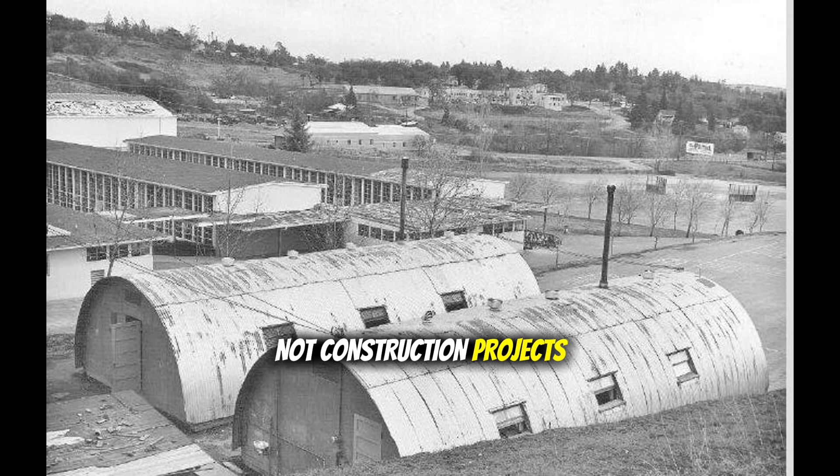The Navy consolidates this thinking at their facility in Quonset Point, Rhode Island, a freshly commissioned air station on Narragansett Bay.

The location isn't random. Rhode Island has deep manufacturing expertise in sheet metal from its jewelry and silverware industries, plus proximity to steel mills in Pennsylvania and shipyards that understand marine-grade corrosion resistance.

In March 1942, the Navy assembles an unusual team: structural engineers from the Stran-Steel Corporation who've been building prefab farm buildings, architects from George A. Fuller Construction Company who specialize in rapid assembly methods, and Navy officers who've actually served in the Pacific and know what typhoon-proof really means versus what it means on paper.

The team lead, Otto Brandenberger, brings farm building experience that turns out to be exactly right for this problem. His Stran-Steel barns use self-supporting arched panels, no internal frame needed, which means no wood for termites to eat and no complex joinery to fail during storms.

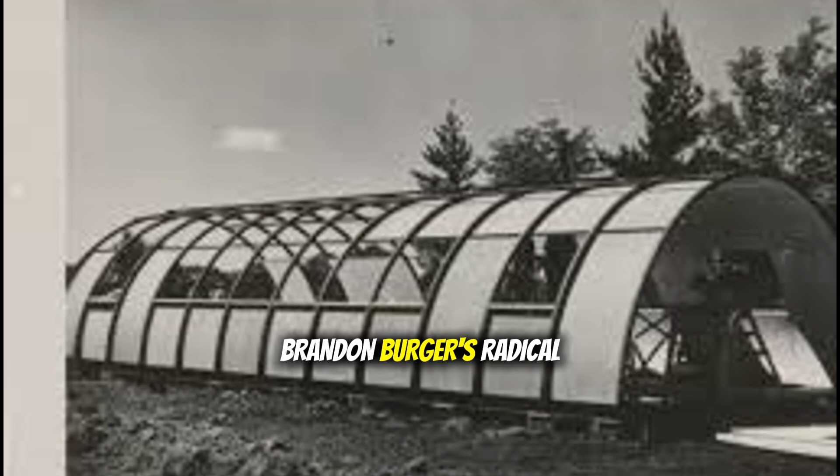Brandenberger's radical proposal: eliminate the Nissen hut's wooden skeleton entirely and make the corrugated steel skin carry all the loads. This violates conventional architectural wisdom in 1942, where steel is for bridges and skyscrapers, not self-supporting buildings. But Brandenberger knows his barns have survived Midwest tornadoes without internal framing, and he's willing to bet the same principle scales up.

The British contribute another crucial element through their painful experience. Their Nissen huts in Burma and Singapore have taught them exactly how tropical environments destroy buildings. Fungus isn't just cosmetic. It literally eats through wood preservatives and paint within months.

Humidity doesn't just make things damp. It corrodes metal fasteners until roofs collapse. Insects aren't merely annoying. Carpenter ants can reduce wooden support beams to hollow shells in one season.

The British reports read like horror stories, but they provide the Quonset team with a checklist of everything that must be engineered out of the design from day one.

No wood in contact with ground. All steel, hot dip, galvanized, not just painted. Ventilation aggressive enough to prevent condensation. Every fastener accessible for replacement without disassembling the structure.

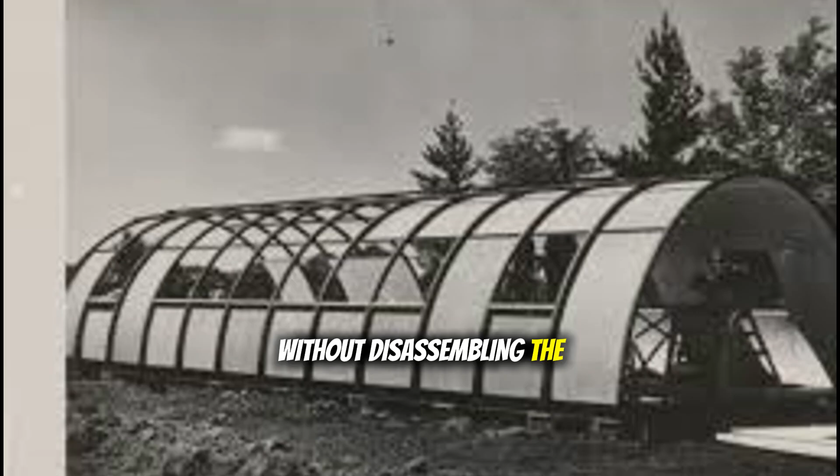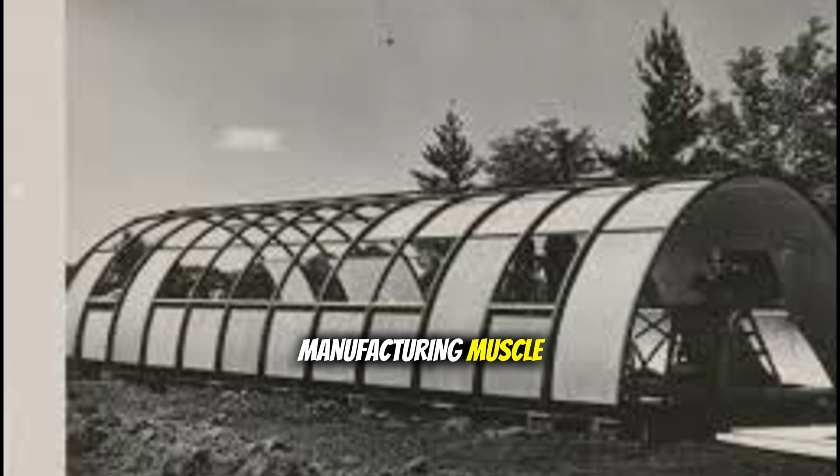By April 1942, the hybrid vision crystallizes. Take the Nissen hut's brilliant arched geometry, strip out everything that makes it heavy or vulnerable, add Fuller's mass production philosophy and American steel manufacturing muscle, then engineer every detail for the specific hell of Pacific Island warfare.

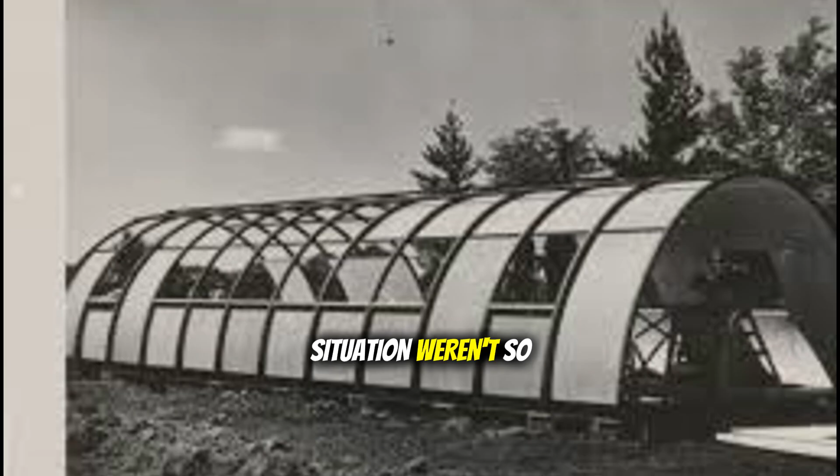April 15, 1942. Otto Brandenberger walks into a Quonset Point warehouse with 30 engineers and a deadline that would be laughable if the war situation weren't so desperate: 60 days to design, prototype, test, and approve a completely new building system that doesn't yet exist. The team works in shifts around the clock, sleeping on cots pushed against the warehouse walls, subsisting on Navy mess hall coffee, and the kind of pressure that either produces brilliance or complete collapse.

Brandenberger divides his crew into specialist teams. One group tackles aerodynamics and structural loading. Another figures out how to nest components for shipping. A third works exclusively on the joint and fastener problem that plagued the British design.

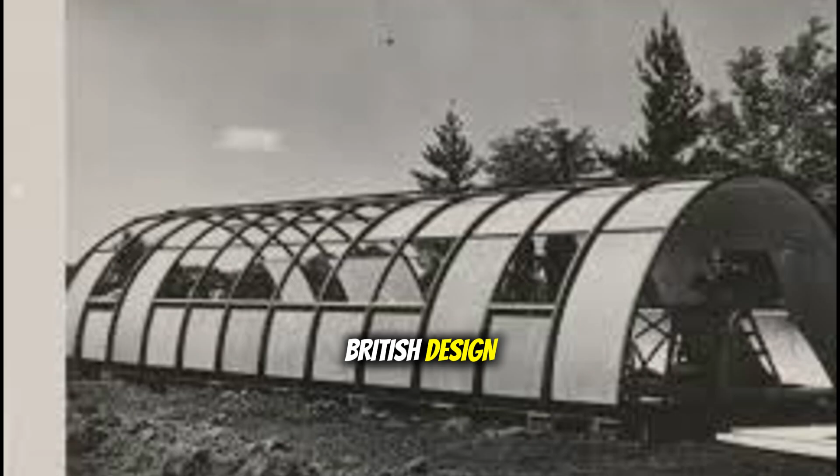The first radical decision happens on day 3. Traditional architectural drawings take weeks to produce, and the team doesn't have weeks. Instead, they build in real time: sketch a detail in the morning, have the metalworking shop fabricate it by afternoon, test it overnight, and revise by dawn.

This iterative prototyping approach is standard in 2025, but revolutionary in 1942, when buildings are designed completely on paper before a single piece is cut. The warehouse floor becomes a laboratory, scattered with failed joint experiments, bent test panels, and increasingly refined versions of each component.

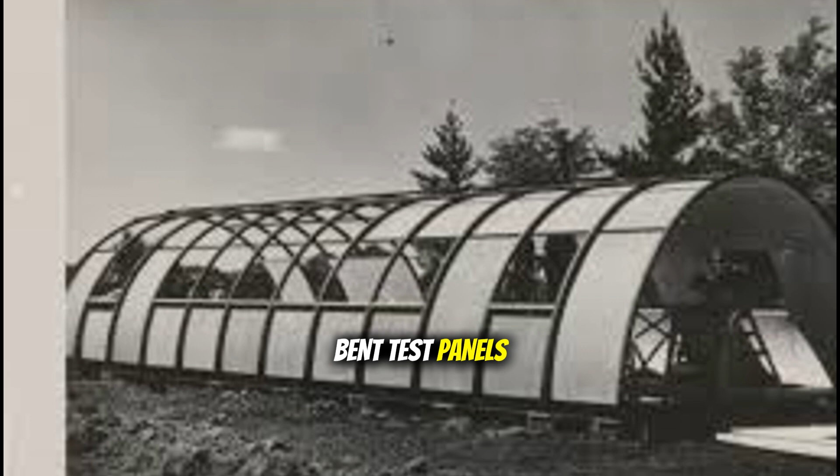The engineers steal a technique from aircraft manufacturing. Every part gets a number. Every revision gets documented, and nothing moves to the next prototype generation without solving the previous version's failure points.

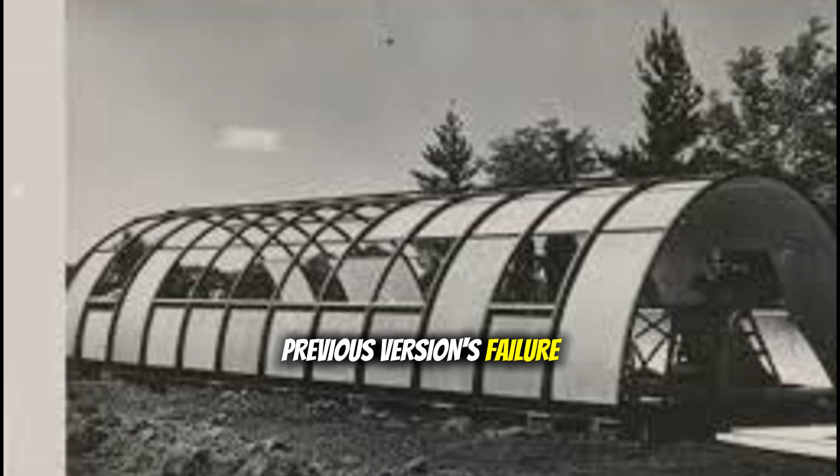The dimensions come from brutal practicality rather than aesthetic choice: 16 feet wide, the maximum that fits on a standard railcar without special permits; 20 feet long per section, short enough that 4 men can lift a panel, but long enough to create usable interior space.

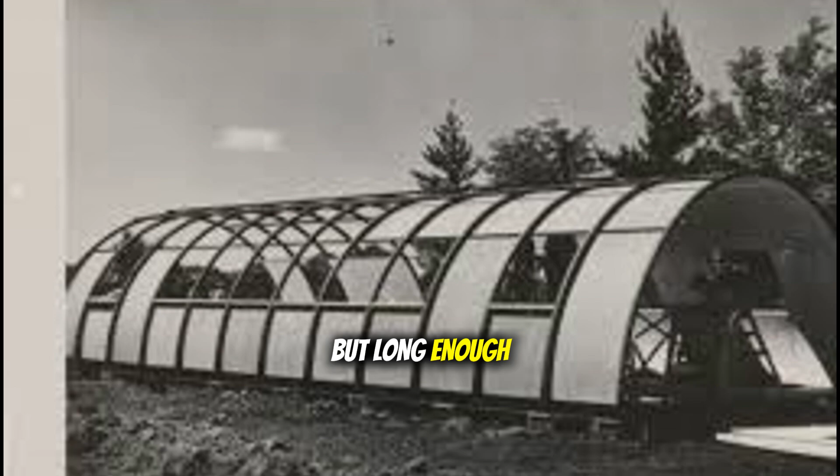Make it smaller and you waste shipping capacity. Make it larger and the panels become too heavy for field assembly, or the arch starts requiring internal supports that reintroduce all the problems they're trying to eliminate.

The arch radius calculation consumes 2 full weeks of the 60-day deadline. Too flat and wind forces could peel the structure like a sardine can. Too steep and you waste interior headroom and create difficult end wall geometry.

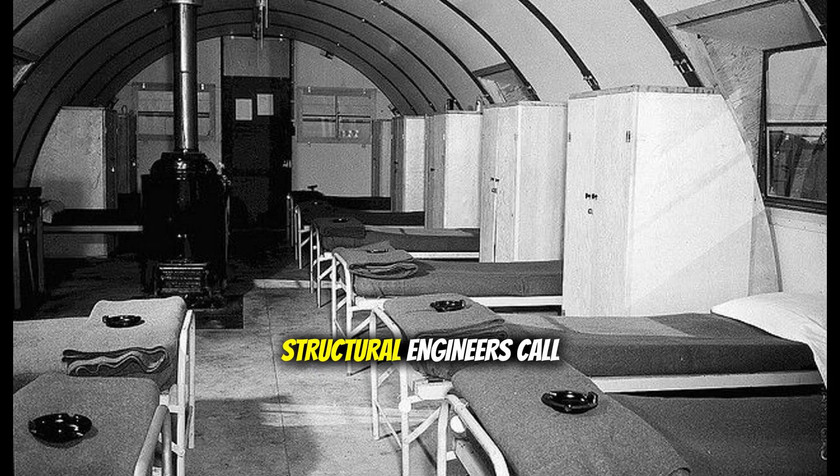Brandenberger's team settles on an 8-foot radius, a perfect semicircle that provides 7-foot headroom at the sides and creates what structural engineers call a self-bracing arch. The corrugated steel naturally wants to hold this curve, which means the panels can be thinner and lighter than flat sheets would require for the same strength.

They run load calculations showing this design can theoretically handle snow loads up to 40 pounds per square foot and wind speeds exceeding 100.

But theoretical calculations in Pacific typhoons are different animals. By day 40, they have something that looks like it might work: a Frankenstein's monster of riveted panels, experimental joints, and borrowed hardware.

The first complete prototype goes up on May 25, 1942, assembled by 6 sailors given 4 hours of instruction and basic hand tools. Assembly time: 14 hours, encouraging but not yet good enough. The Navy wants single-day construction capability because marine landing schedules don't allow for multi-day building projects.

The team identifies the bottleneck immediately: the floor system. They've been trying to include a wooden floor as part of the package, but it's the slowest part to assemble, and the first thing to rot in tropical conditions anyway.

The solution is elegant in its simplicity: eliminate the floor entirely from the basic design. The hut sits directly on whatever surface exists: coral, sand, dirt, or if you're lucky, gravel. For applications requiring finished floors, those can be added later as a separate project. But the basic shelter achieves weather protection without them. This single decision cuts assembly time to 8 hours and reduces shipping weight by 1,200 pounds per unit.

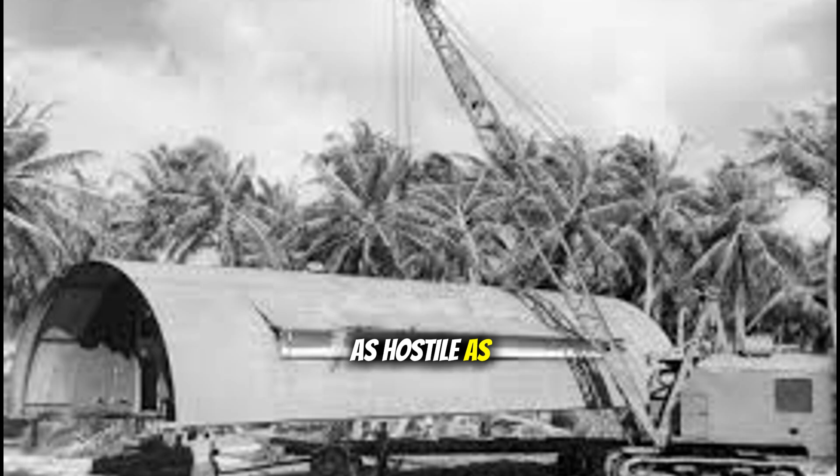The jungle environment proves as hostile as enemy action. Within 2 weeks, red rust streaks appear on any ungalvanized fasteners. The salt air eats through standard hardware like acid. Fungus grows on everything that holds moisture, turning the inside surfaces into abstract art exhibits of black and green mold. The ventilation louvers that seemed adequate in Rhode Island testing barely move the suffocating air.

Marines start propping doors open 24/7 and cutting additional vent holes with tin snips, violating structural specifications but making the huts livable. These field modifications get documented and sent back to Quonset Point, where engineers incorporate them into later production runs—more ventilation, larger louvers, and every single fastener galvanized regardless of location.

Iwo Jima, February 1945. The volcanic island offers a different kind of hell: black sand that blows into every crevice, no topsoil for grounding stakes, and the constant threat of artillery from Mount Suribachi. Seabees arrive on D-Day plus 2 and start assembling Quonset huts under fire, literally bolting panels together while mortar rounds impact 200 yards away. The volcanic sand proves impossible for traditional stake anchoring.

So crews improvise by filling empty oil drums with sand, with cables connecting drums to the hut bases. When a Pacific typhoon hits in March with 110 mph winds, those improvised anchors hold while wooden structures across the island disintegrate. The base commander's report back to Pearl Harbor is succinct: Quonset hut survived. Everything else gone.

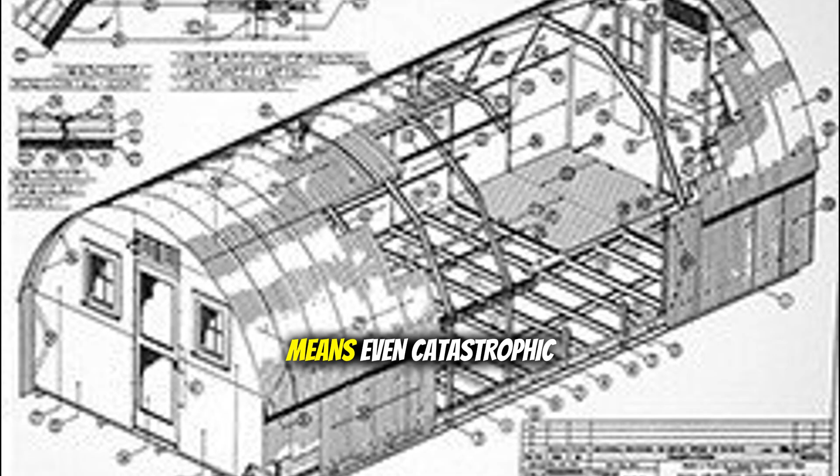Instead, the arch shape channels the blast force outward through the walls and roof in a pattern that leaves the structural frame twisted but standing. EOD crews examining the wreckage note that a rectangular building would have collapsed completely, trapping anyone nearby under tons of rubble. The arch's inherent strength—that compression ring effect—means even catastrophic damage doesn't trigger total structural failure.

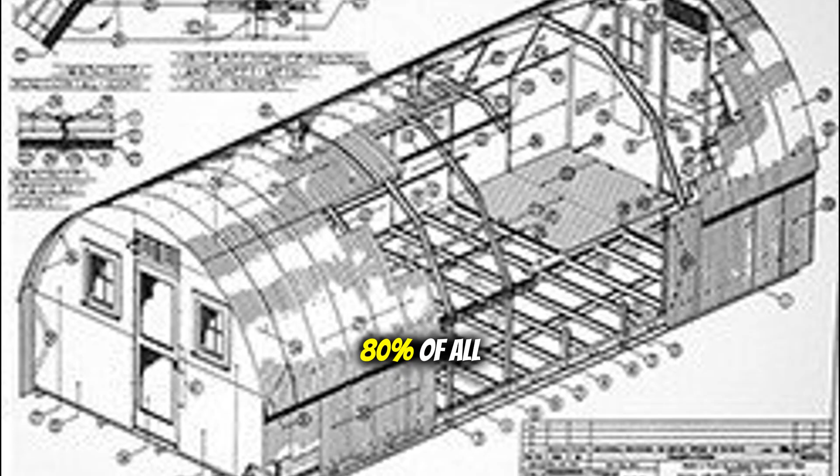The Pacific typhoon season of 1944 delivers the ultimate stress test. Super Typhoon Cobra hits the Philippines in December, with winds measured at 140 mph and a 20-foot storm surge. At Tacloban, the storm destroys 80% of all structures on the base. Wooden buildings explode into splinters.

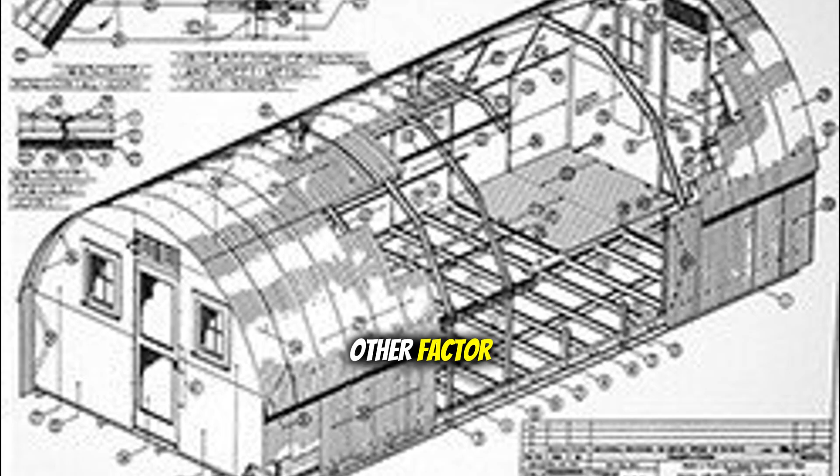Concrete block structures collapse when wind undermines their foundations. But of 43 Quonset huts on the base, 39 survive intact and 4 suffer repairable damage—bent panels and torn seams, but no total failures. Engineers analyzing the survivors find that proper anchoring matters more than any other factor. Huts with adequate ground attachment ride out the storm; those with improvised or insufficient anchoring roll like tumbleweeds.

By war's end, field performance data from 50 combat zones feeds back into continuous design improvement.

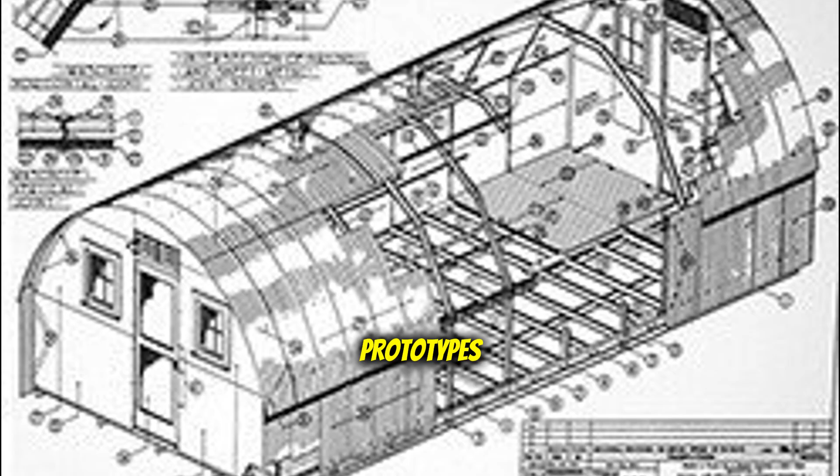The 1945 production models bear little resemblance to the 1942 prototypes. Better ventilation, stronger fasteners, improved insulation options, and field-tested modifications that turn a good design into an exceptional one.

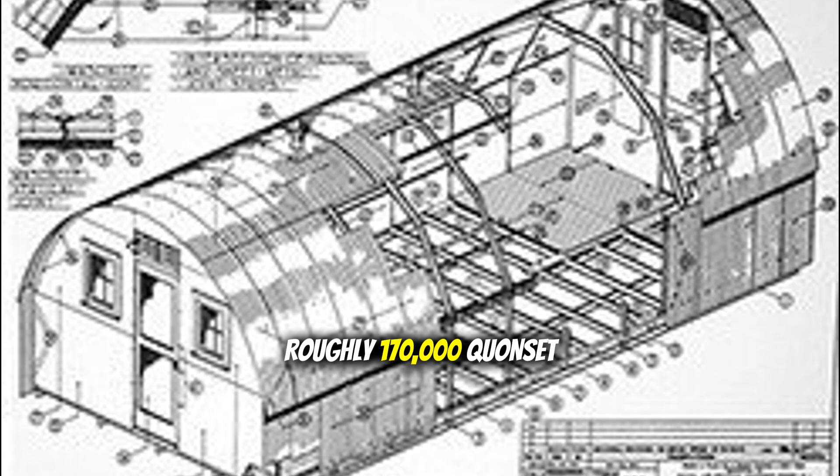May 8, 1945: Victory in Europe. August 15, 1945: Victory over Japan. Suddenly, the United States military owns roughly 170,000 Quonset huts scattered across 6 continents and has absolutely no idea what to do with them. The original plan assumed these were temporary wartime expedients that would be scrapped or abandoned once permanent facilities could be built.

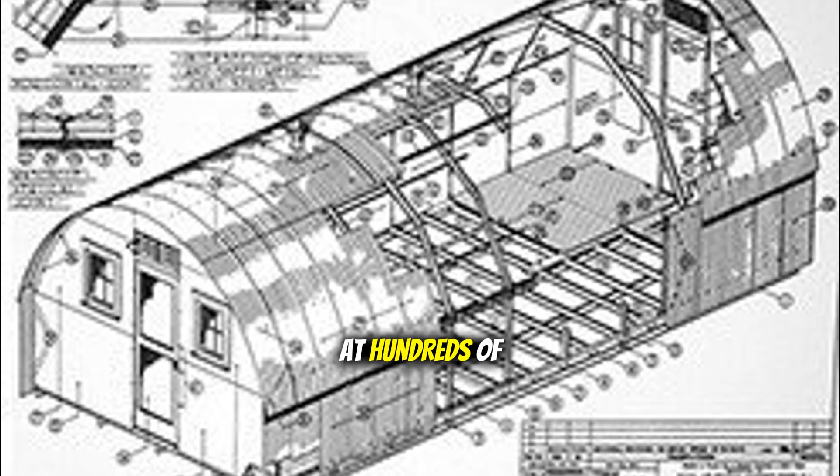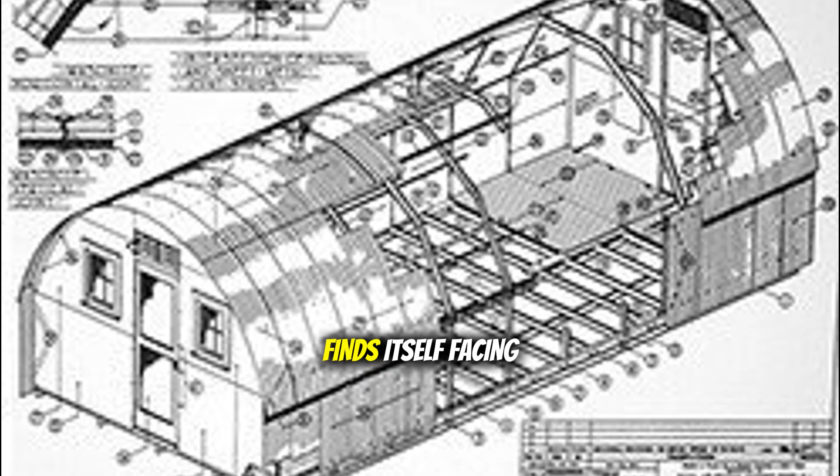But something unexpected happens: nobody wants to get rid of them. At hundreds of military bases slated for closure or downsizing, commanders look at their Quonset huts and see not obsolete wartime relics, but perfectly functional buildings that cost nothing to maintain and can be repurposed for virtually anything. The War Assets Administration, tasked with liquidating surplus military property, finds itself facing an unusual problem: there's more demand for used Quonset huts than they have inventory to sell.

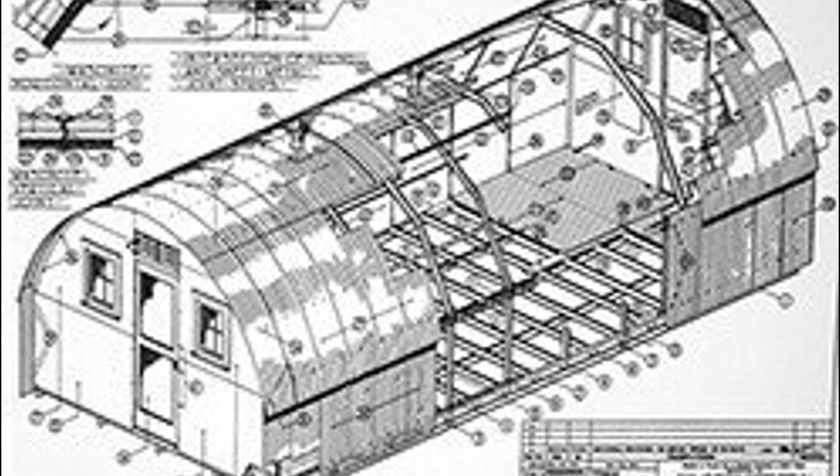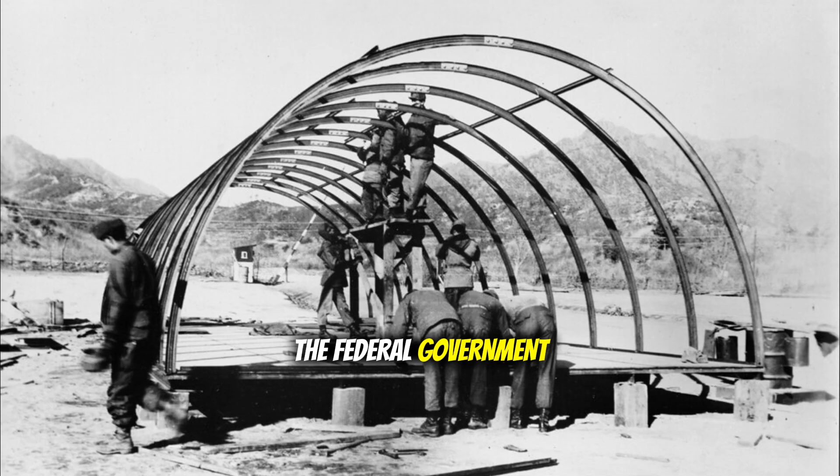Veterans returning home discover a housing shortage so severe that families are living in converted chicken coops and sharing apartments with 3 other families. The construction industry, starved of materials and labor during 4 years of war, can't build fast enough to meet demand. Into this crisis steps the Quonset hut, now available for civilian purchase at liquidation prices, $1,000 to $2,500 for a complete structure that would cost $8,000 to build conventionally, if you could even find contractors available to build it. The federal government actively encourages this repurposing through programs that prioritize veterans for Quonset purchases.

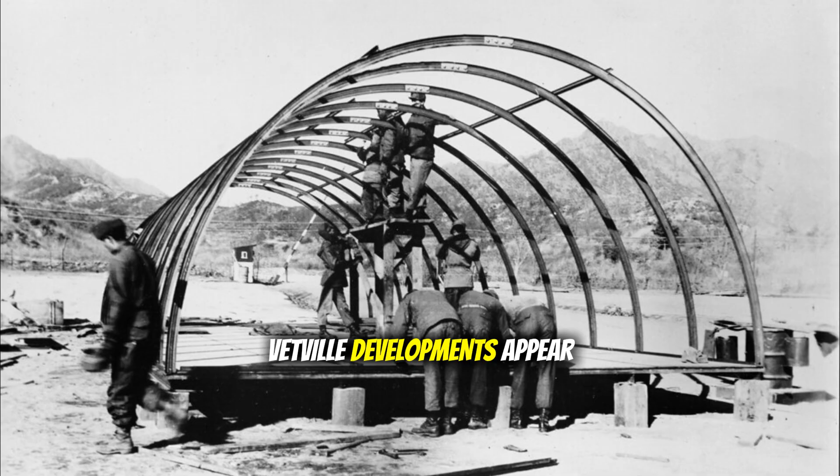By late 1946, suburban developments made entirely of Quonset huts spring up around every major city. Roger Young Village in Los Angeles houses 750 families in converted military huts. Vetville developments appear near universities, where the GI Bill is flooding campuses with students who need immediate housing.

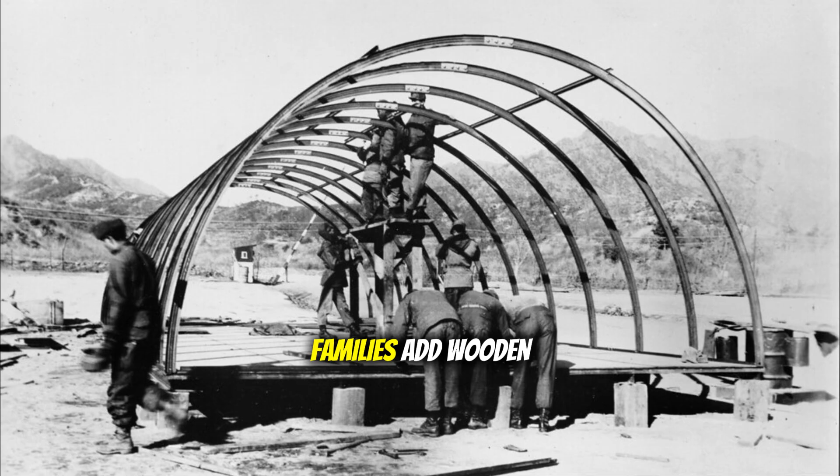The architectural adaptation gets creative fast. Families add wooden facades to the curved ends, making the structures look less like military surplus and more like quirky cottages. Interior walls divide the open space into bedrooms, living areas, and kitchens. Windows get cut into the steel sides, violating every structural principle but making the spaces actually livable for family life. Some owners go further, burying the entire structure halfway into the ground for earth-sheltered insulation or connecting multiple huts end-to-end to create sprawling compound homes.

Housing inspectors and building code officials initially balk at approving these modifications, but the housing shortage is so desperate that municipalities reluctantly grant permits. In Portland, Oregon, an entire neighborhood called Fairview Addition consists of 350 Quonset homes. Residents plant gardens, paint their steel walls cheerful colors, and build conventional-looking porches that disguise the utilitarian origins.

Churches discover Quonset huts solve a different problem, providing worship space for exploding suburban populations without the decade-long capital campaigns traditional church buildings require. First Presbyterian Church of Levittown, Pennsylvania, holds services in a Quonset hut from 1952 until 1967, when they finally raised funds for a conventional sanctuary. Dozens of congregations make the same calculation: $2,500 for immediate space beats $150,000 for eventual grandeur.

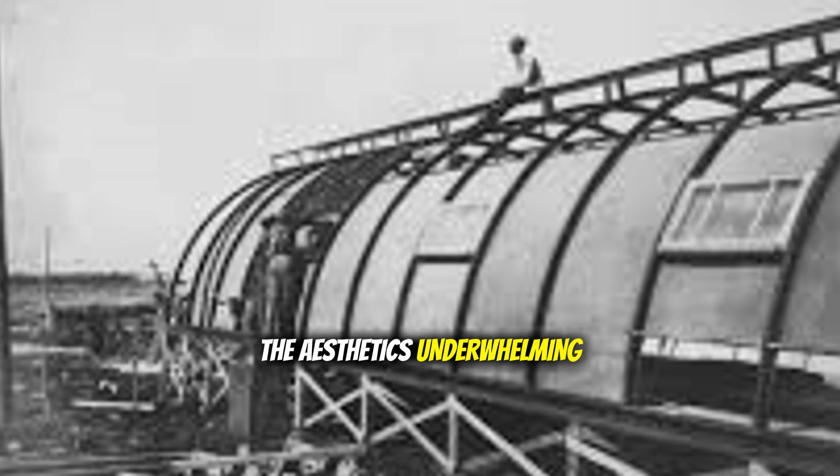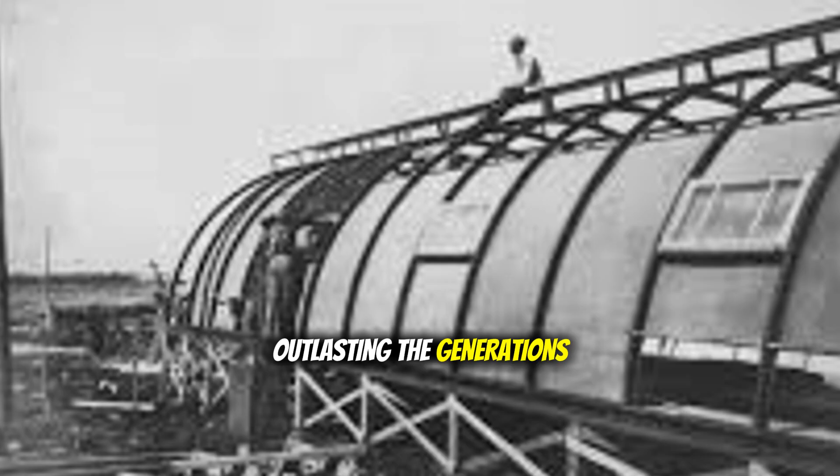The acoustics are terrible, the aesthetics underwhelming, but people can gather for worship next month instead of next decade. Some of these temporary church huts remain in service for 30 years, outlasting the generations who first considered them stopgap solutions. Education sees similar adoption.

Post-war school enrollment explodes as the baby boom hits, and school districts face the same impossible math that plagued the military in 1942. They need classrooms immediately, and conventionally built schools take years to construct. Rural districts especially embrace Quonset classrooms. A single hut provides space for 30 students at 1/10 the cost of traditional construction.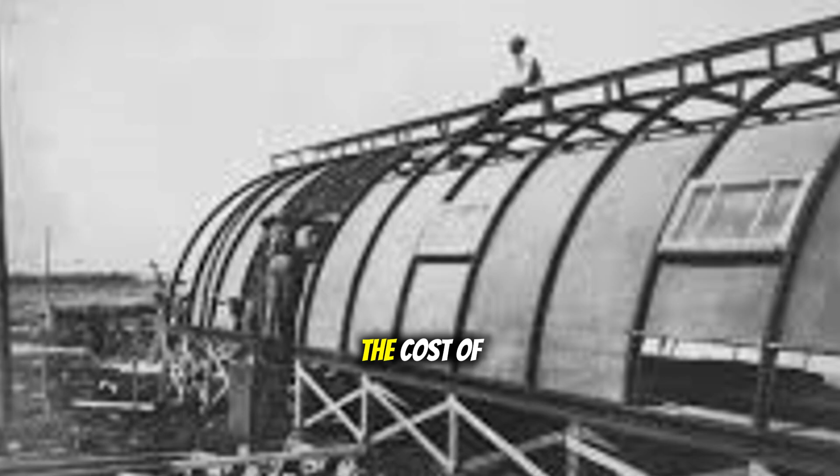By 1950, an estimated 3,000 schools across the United States include at least one Quonset hut classroom. Some students spend their entire elementary education in these steel tunnels, learning multiplication tables and history lessons under curved ceilings that once sheltered B-29 crews in the Pacific.

The commercial sector joins the party. Small businesses, machine shops, auto repair garages, warehouses, farm equipment storage recognize that Quonset huts deliver clear span space without internal support columns, making them perfect for industrial work. A welder can set up shop in a surplus hut for less than 2 months' rent in conventional commercial space.

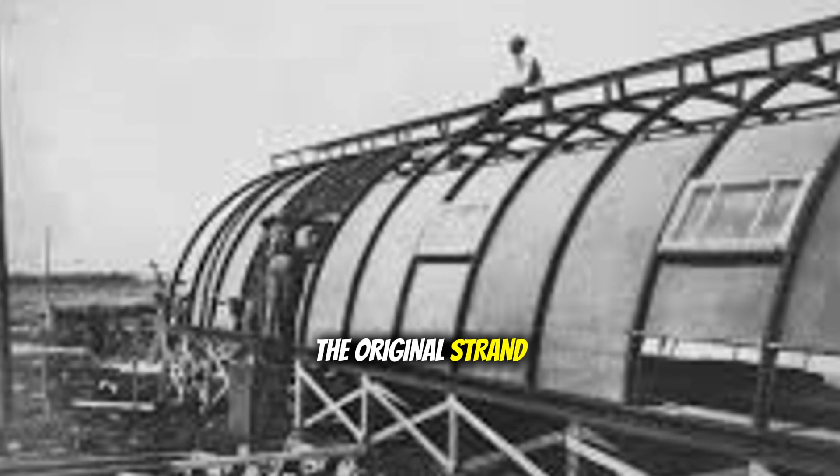Agricultural use proves especially popular. The original Stran-Steel Corporation, having helped design military Quonsets, returns to manufacturing civilian versions specifically marketed to farmers. Thousands of Midwestern farms add Quonset storage buildings for grain, equipment, and livestock shelter. The maintenance requirements are minimal: hose off the exterior once a year, check the bolts occasionally, and the structure lasts indefinitely.

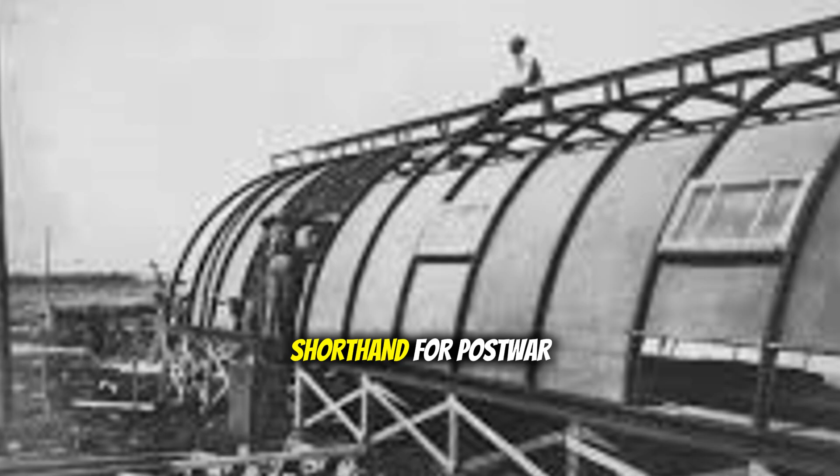This civilian adoption creates an accidental architectural legacy. Quonset huts become embedded in American visual culture as symbols of practicality over pretense, function over form, and making-do ingenuity. They appear in movies, television shows, and photographs as shorthand for post-war optimism mixed with austerity. Architectural historians initially dismissed them as temporary eyesores, but by the 1990s, preservationists start recognizing surviving Quonset huts as important examples of adaptive reuse and vernacular architecture.

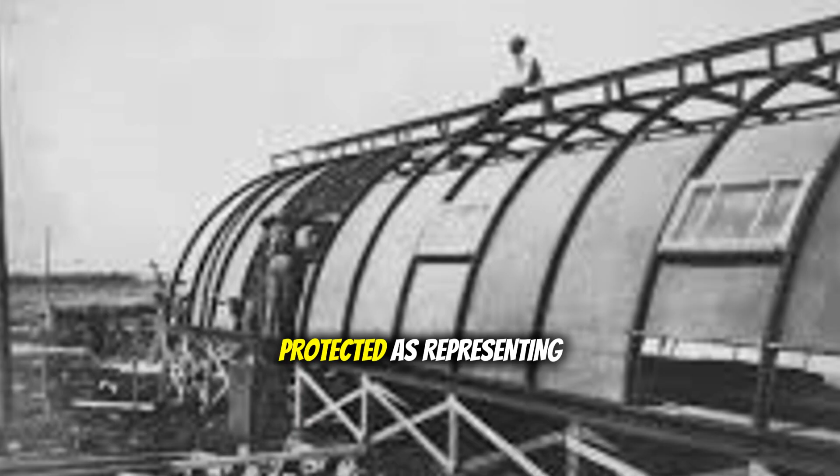Several achieve historic landmark status, protected as representing a unique moment when military technology successfully transitioned to civilian life. Modern disaster zones tell you everything about why the Quonset hut's DNA keeps reappearing in 21st century emergency response.

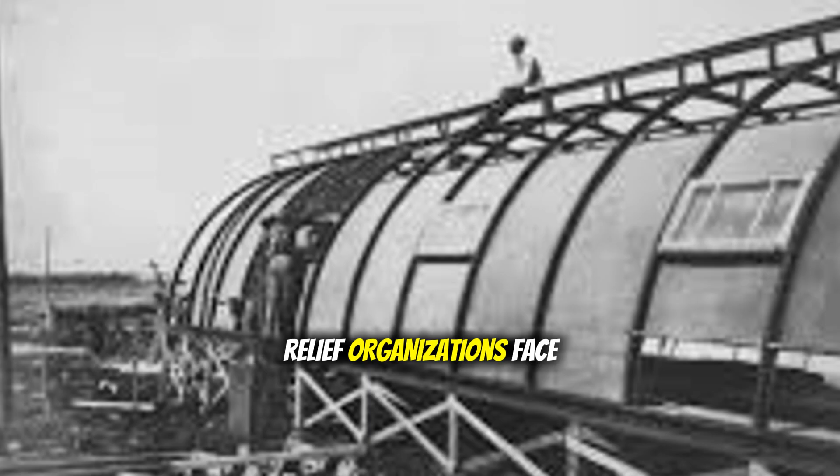When the 2010 Haiti earthquake destroys Port-au-Prince, relief organizations face the same equation American military planners confronted in 1942: immediate shelter for hundreds of thousands of displaced people, no existing infrastructure, no time for conventional construction, and conditions that destroy inadequate temporary housing within months.

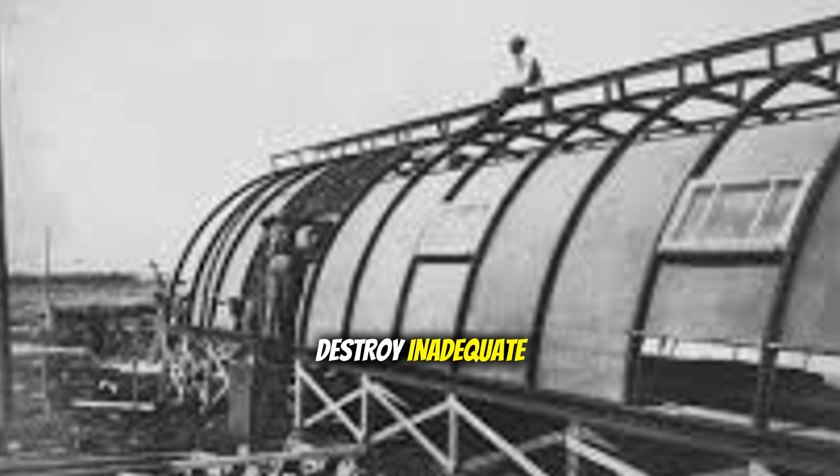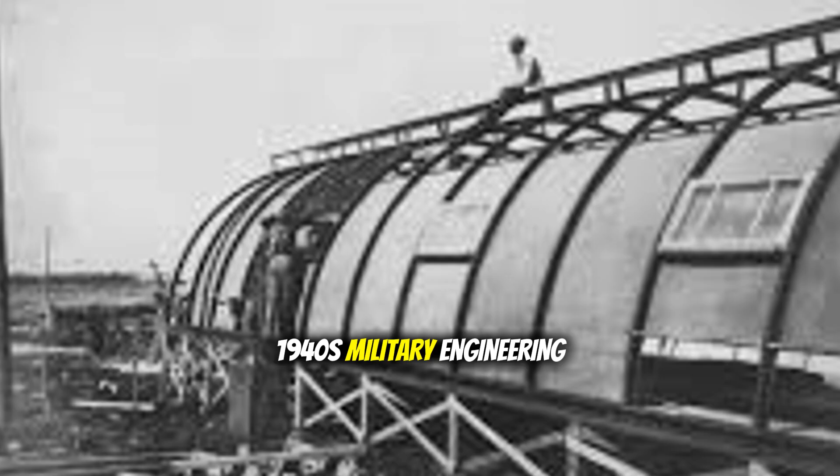The solution that emerges borrows directly from Quonset principles, even when designers don't realize they're channeling 1940s military engineering: arched steel frames, corrugated metal panels, prefabricated components that ship flat and assemble quickly. The basic formula hasn't changed because the underlying physics and logistics haven't changed.

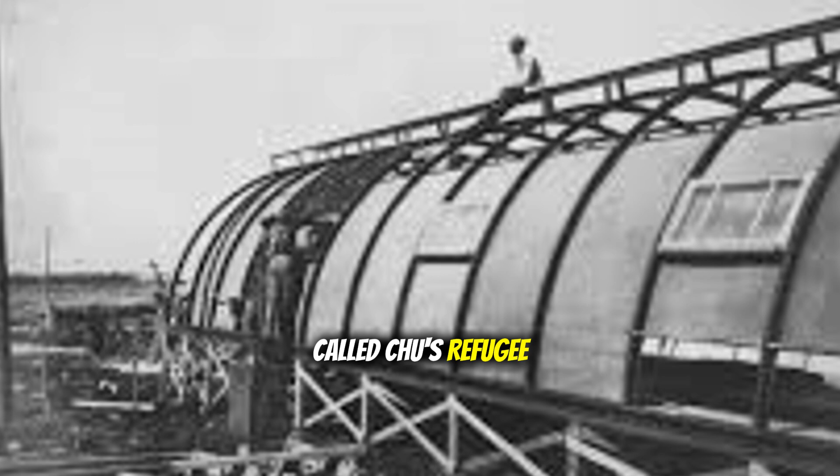The United Nations High Commissioner for Refugees currently uses shelter systems called RHUs, refugee housing units, that are essentially Quonset huts with 80 years of material science improvements. Instead of corrugated steel, they use insulated composite panels. Instead of bolt-together assembly, they employ snap-fit connections. But the core concept remains identical.

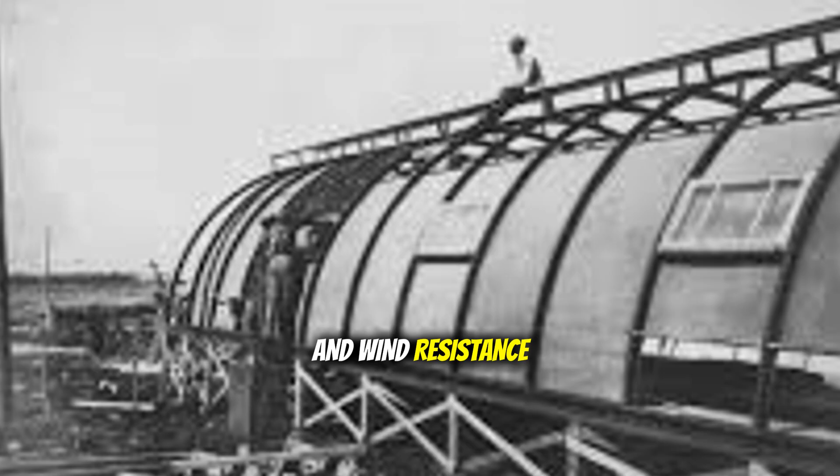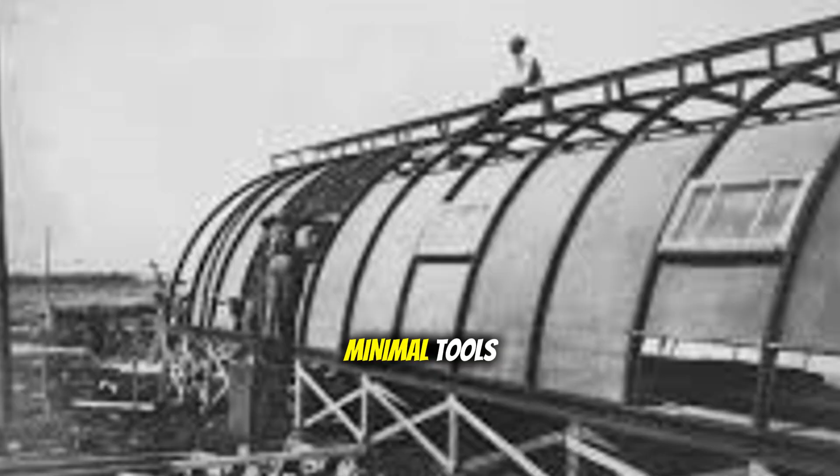Curved profile for structural efficiency and wind resistance, self-supporting arch eliminating internal framing, flat-pack shipping allowing massive quantities to reach remote locations, and assembly by unskilled labor with minimal tools. A two-person crew can erect a modern RHU in 4 hours, almost exactly matching the 1942 Quonset specifications. These units currently house over 200,000 displaced persons in refugee camps across Africa, the Middle East, and Asia.

Hurricane-resistant construction has rediscovered arch geometry after decades of building conventional rectangular structures that hurricanes repeatedly destroy. After Hurricane Katrina devastated the Gulf Coast in 2005, engineers studying which buildings survived found that curved structures consistently outperformed rectangular ones. The Mississippi coast saw entire neighborhoods of conventional homes reduced to foundation slabs, while a handful of Quonset-style metal buildings stood intact with minor damage.

This empirical evidence triggered research into what structural engineers call aerodynamic architecture, designing buildings that work with wind forces rather than resisting them through brute strength. The result looks remarkably like a Quonset hut because the physics haven't changed. Wind flowing over a curve creates less pressure than wind slamming into a flat surface.

Today, exactly as it did in 1942, the modern tiny house movement unknowingly reinvents Quonset principles when designers seek maximum interior space with minimum materials and cost. Several companies now manufacture arch-roofed prefab cabins using the same corrugated metal and self-supporting curve that Otto Brandenberger pioneered. These sell to buyers seeking affordable housing, disaster-resilient structures, or off-grid living solutions. The marketing emphasizes sustainability and modern design, rarely mentioning that the fundamental architecture is a World War II military shelter.